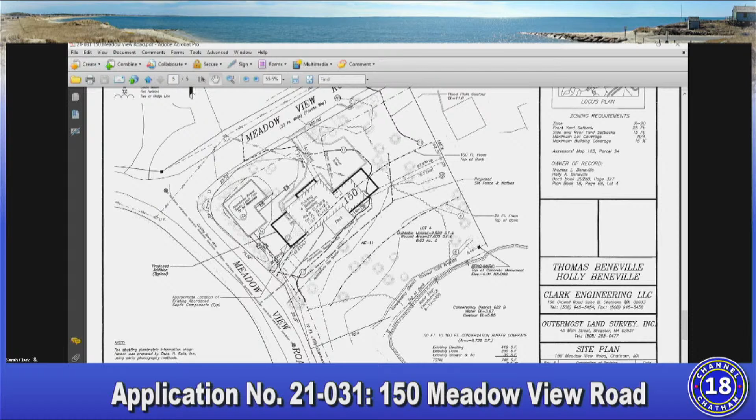Impact of scale, siting, and mass on neighborhood visual character, including views, vistas, and streetscapes. As you know from driving down the street, there's a lot of vegetation on the Beneville lot.

And the house is set back, so that the ridge height is not changing. There will be a second floor over the garage, and there will be a second floor over the master bedroom addition, and they've put dormers in there to provide some light and make them a little more useful. But you don't have the full 2-story visual impact you have from some of the homes on the way in

from Barn Hill Road. So we believe that because of the way the design is sited on the property and how they managed to keep the same scale, these changes will actually have a positive effect on the neighborhood visual character and streetscape.

As you know from being there, there's no views and vistas to be concerned about. So I think that you could find that this project, as designed, does not constitute something substantially more detrimental to the neighborhood than the existing project.

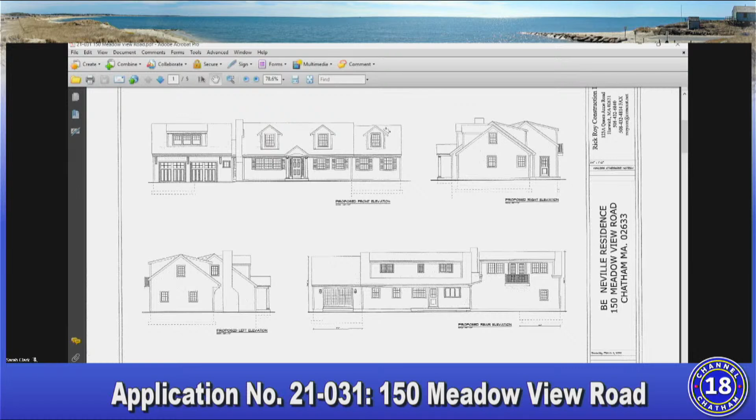If you noticed when you went to the property, there's an elevated or raised septic system in the front corner of the lot, because the town has run sewer down there. The property will now be on the sewer, and that septic system, which is not particularly attractive, a lot of trees around it, will be removed. And so we think that will actually enhance the look of the property and the way it fits into

the neighborhood. The impact of traffic flow and safety, it's just Tom and Holly there most of the time. We don't think there'll be any impact on traffic flow and safety. And noise and litter, Tom told me they're very quiet, so we don't think there's going to be any problem.

So that would be our presentation. I did want to point out the note from Dave Clark, in which he points out that in 2014 the floodplain was elevation 8, which is elevation today on the current plans. So prior to the 2014 map change, the buildable upland was in excess of 25,200 square feet.

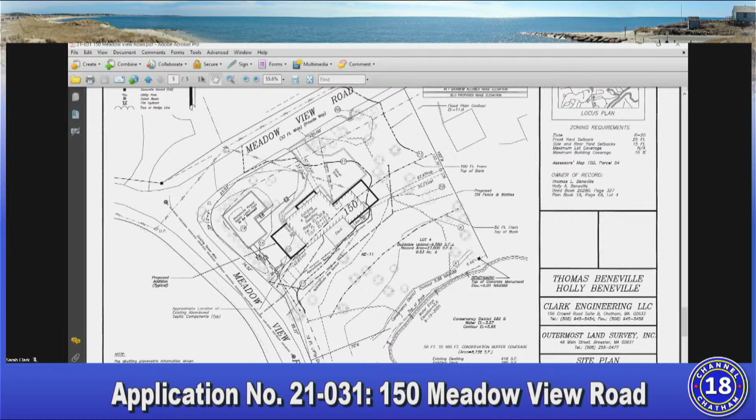So we believe that the proposal is reasonable under the circumstances and is not substantially more detrimental. And that would be our presentation, Mr. Chair.

Okay, thank you, Mr. Riley. I would now ask if there's anyone in the audience who wishes to speak in favor of this application. If there is anyone, please indicate on the screen that you wish to speak so that Sarah can recognize you. I see no one that wishes to speak in favor of this application.

Okay, then I'll read the correspondence. The first is a memo from Judith Giorgio, the health agent for the town. Board of Health, she writes on 5/12, I have reviewed the plan to add an addition. The property is connected to the town sewer system. The proposal does not add sewer flow to the property.

I have no concerns. And then we have a note from our new conservation agent, that is Nicole Smith. She writes on Wednesday, April 21st, the applicant has received approval for this project from the Conservation Commission and an order of conditions has been issued. The submitted site plan matches what was approved by Conservation. That is the extent of the correspondence.

I would now ask if there's anyone in the audience who wishes to speak against this or has a specific question. If so, please indicate on the screen so that Sarah can recognize you. I see no one that has a specific question or wishes to speak in opposition.

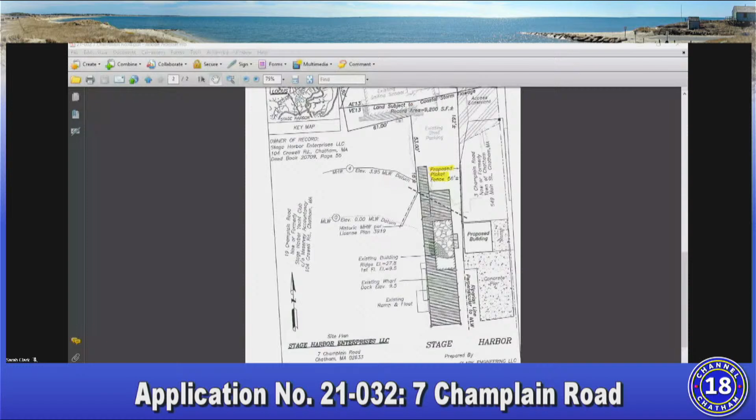I see no one that wishes to speak in favor of this application. Okay, then the correspondence, the first one we had was from Nicole Smith,

who wrote in April, the proposed fence is not included on the most recently approved site plan. Well, she then wrote after that, ignore previous comment, I didn't realize they were on the next agenda. Pending approval of the RDA, conservation is okay with the project proceeding.

And then we have a note. This is from Sharon Brown, and she writes on April 28th, Michelle Hannon, our new collections assistant, has reviewed the account history and informed me that Stage Harbor Yacht Club has not paid their water bill in months. If they are paying today, the amount due is as shown. Otherwise, they may want to add a little extra to cover the interest.

So, Mr. Riley, what's the story on that? Well, I forwarded that email to my client, and there was a lot of head scratching going on, and then they just wrote a check for the $43 or whatever it is, and they don't know why the bill wasn't paid, but anyway, it's paid now. Thank you very much. Okay.

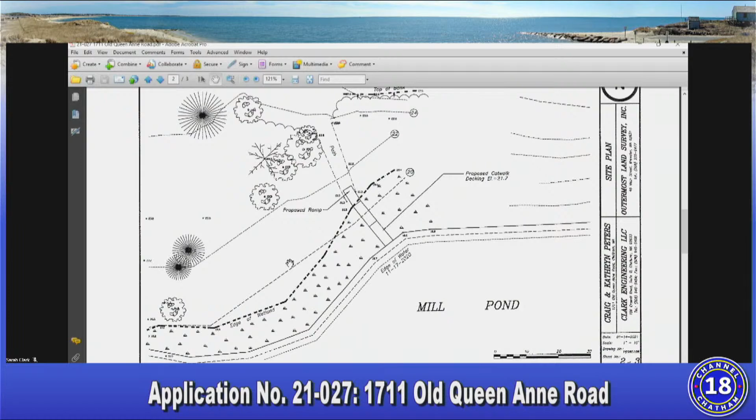Thanks. So this is a request for placement of a portable catwalk to provide for access to the pond, generally known as Mill Pond, behind our house on Old Queen Anne Road. The plot plan is shown here, including the size, which is fairly limited. We have had this reviewed by our environmental consultant with the conditions of making it non-opaque. It will be aluminum, so there's no wood leaching, and the interpretation was no impact on local vegetation. We would have it in position only from May to October, and then remove it and store it up on the property during the winter months. We went through the appeals criteria, most of which are either included in the plans that you're looking at, or were not directly relevant in terms of things such as scale and local compatibility, sewage, and traffic as such.

Okay, I don't think you need to elaborate on any of the criteria. Anything else to add, or you're done? No, I think unless there were specific questions. Okay, well, we'll get to that.

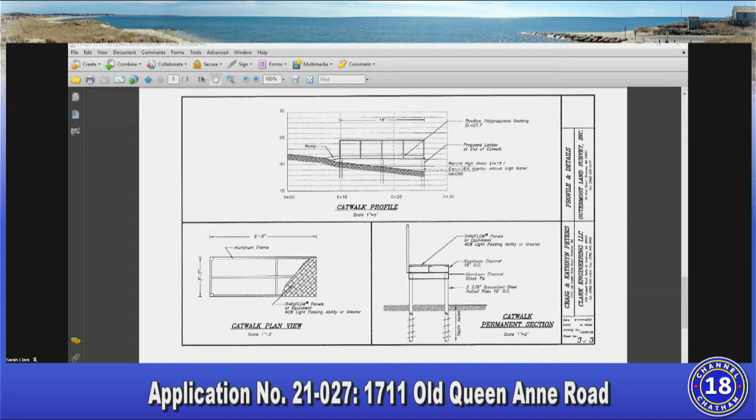Very good. All right, I would ask in the audience if there's anyone who would like to speak in favor of this application to please indicate on the screen so that Sarah can recognize you to do so now. I see no one that wishes to speak in favor of this application.

Okay, then the correspondence is from Nicole Smith. As I mentioned, she's our new conservation agent. She writes on April 28th regarding 1711 Old Queen Anne. They will be before us again on May 12th. They will likely be approved, but at the last hearing, we were waiting for the state to issue the permit number and for comment regarding endangered species. All the other filings have been received by the Conservation Commission approval, except for Riverview, which, well, that's getting off the path.

So tell me what happened at the meeting on May 12th? Mr. Peters? David Clark, who I think is... Okay, David Clark attended that meeting and may be able to give us that information. Please. David Clark here, Clark Engineering.

So we continued the meeting on May 12th to May 26th because we were not in receipt of the comment letter from the Endangered Species Program in Massachusetts. Secondly, Conservation asked for a mitigation plan, which is still being prepared, so they want 2-to-1 mitigation for the footprint of the catwalk. Blue Flax Design is finishing that plan up, and we will present it to the commission on the 26th.

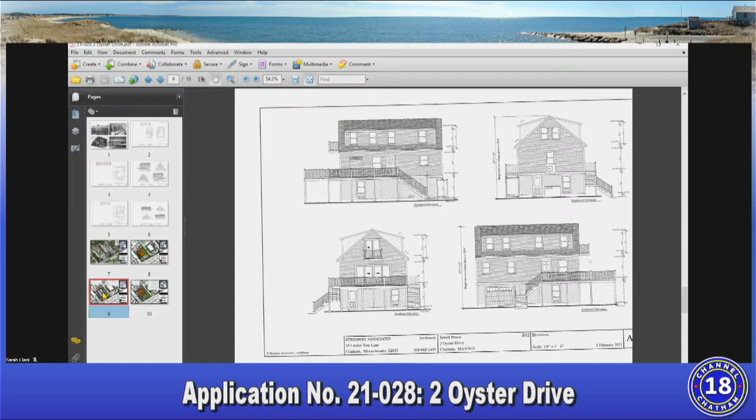Because of raising the first floor above the ground, one has to provide some outdoor space to congregate immediately outside your living area, which we are adding a deck, smaller than the existing patio area, around two sides. A small deck would allow two means of egress, which is required by code. The stair coming up in the front turns because it has to avoid the garage door opening. But in this case, it is well behind the lot line, 2.6 feet behind the lot line.

Those are the extensions. There's a little bump on the right hand, northeast side. That's a little gas stove equivalent to a fireplace chimney. So this is very simple and straightforward. We have a few things we're hoping to accomplish inside with 3 bedrooms, living room, dining room, and kitchen.

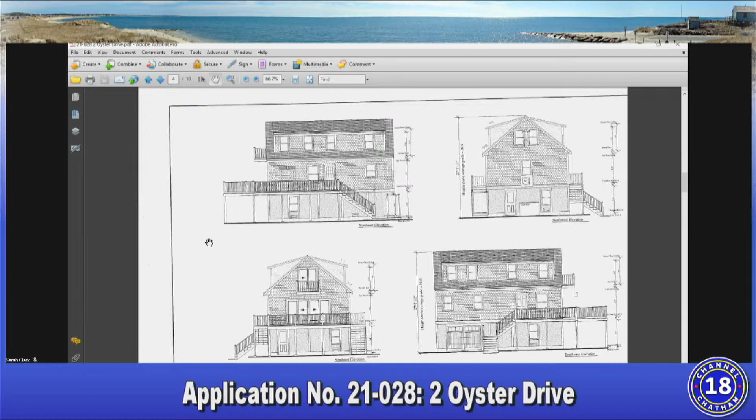The impact on visual character and views of vistas: the proposed house, as raised, consists of a first floor with a combined living, dining, kitchen, utility room, and half bath. Second floor consists of 3 bedrooms and 2 baths, adding the second floor dormer space within the 1-story roof. The lower level is treated as a storage area with only a few windows to keep it in scale. All parts of the elevation are designed to follow pleasing proportions, and the raised level will improve the view of Chatham's eastern shore from the deck.

Compatibility with the neighboring uses: the proposed structure is purely residential in nature and fully compatible with the residential district.

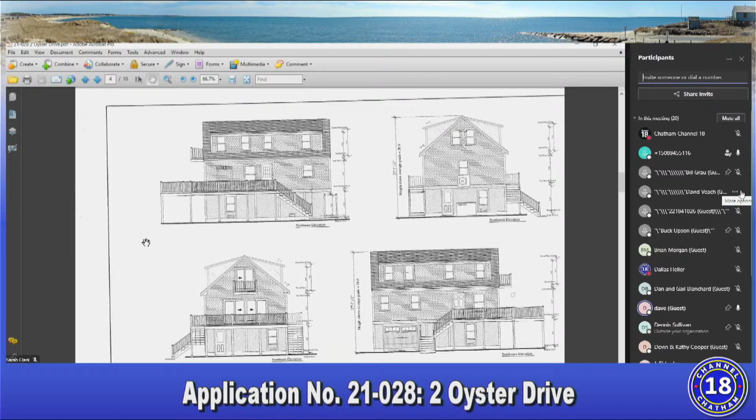Adequacy of sewage disposal, source of water and drainage: the existing house is on a condominium septic system, which is sized for no increase in flow of the existing 2-bedroom sewer, and no increase in flow is necessary. The house has town water supply.

Impact for traffic flow and safety: the proposed project has no effect on traffic flow and safety. Since the house is located on side streets, construction vehicles do not block traffic. Construction is confined to a small area on the site and should be complete over a short amount of time after the summer.

Adequacy of utilities and services: the house is adequately served by water, gas, and electric.

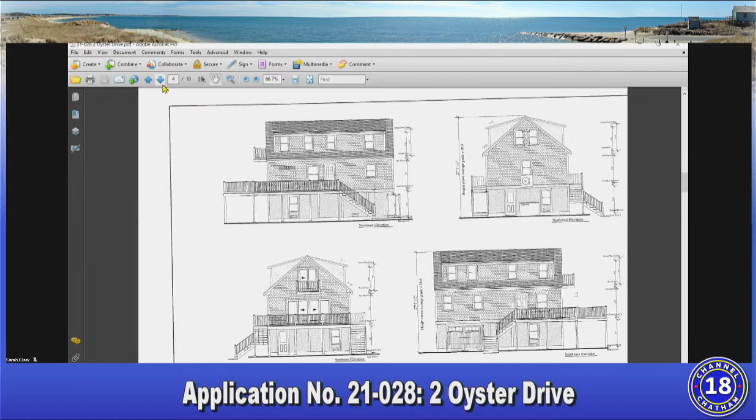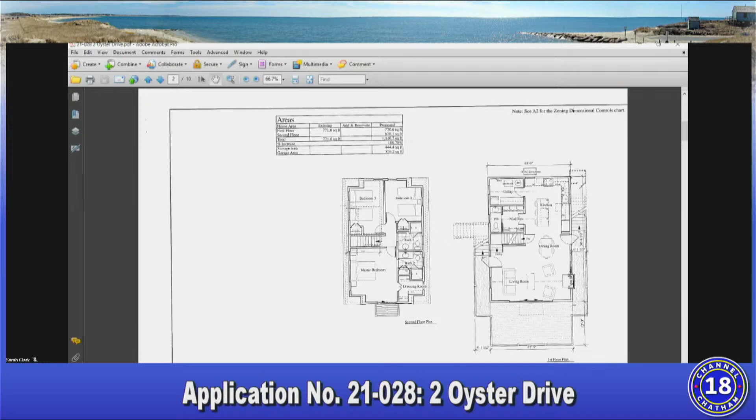Is there anyone in the audience who would like to speak in favor? If so, please indicate on the screen so that Sarah can recognize you now. I see no one that wishes to speak in favor of this application.

I will read the correspondence. First is a memo from Judith Giorgio, Health Agent, Board of Health. She writes on 5/12: I reviewed the plan to demo and rebuild. The property is connected to a shared Title V system. The dwelling proposed does not increase the existing sewage flow above the existing 2 bedrooms, and therefore is acceptable. I have no concerns.

Then we have a note from Catherine Halpern, the Planning Board Chairman. She writes on April 21st: The Planning Board at their April 12th meeting reviewed the ZBA's request for comment. After review of this request, the Board voted 7-0-0 to send a positive recommendation with the condition that the driveway shall be constructed of permeable material and shall be constructed in a manner which permits the unobstructed flow of water.

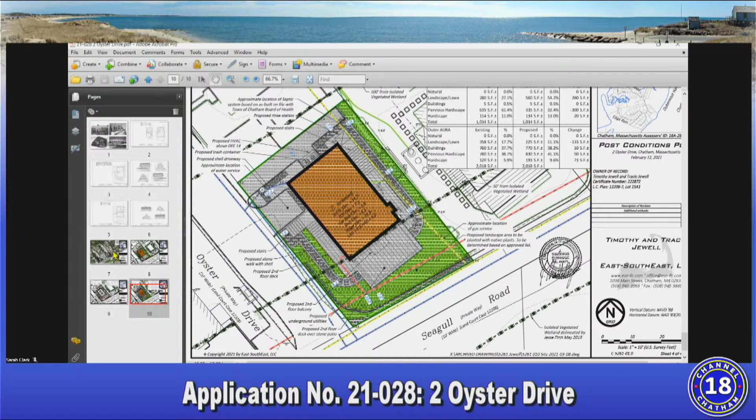There are easements in place for it. That's part of the full shared septic system that's out here. Sarah, if you go to page 1 - I believe we showed, yes, on page 1, if you zoom in a little, you can see the septic system that's out there with all the piping coming from all the buildings going to the rear of the property. That's a fully easemented shared system for the entire neighborhood. I assume that was a septic tank from the symbol, it just didn't appear like any of the other houses - that's why this may be the time to address it. I don't know if in your plan you were planning on doing anything with the tank, utilizing the same tank, not really moving it or changing any other aspect of the septic system. But with a tank encroaching on the adjacent property, this might be the time to address it.

And that tank is there with a variance from the Board of Health and a number of other hurdles. If we were to move it, it would be a little cumbersome. But with the easement in place, it's not broken, no need to fix it.

The other question I had was what material are you going to use on the driveway, assuming you're going to abide by what the planning board suggested? Shell? The driveway exists as a shell, proposed shell driveway. We would maintain the same approach, even the part going up to the garage would be shell.

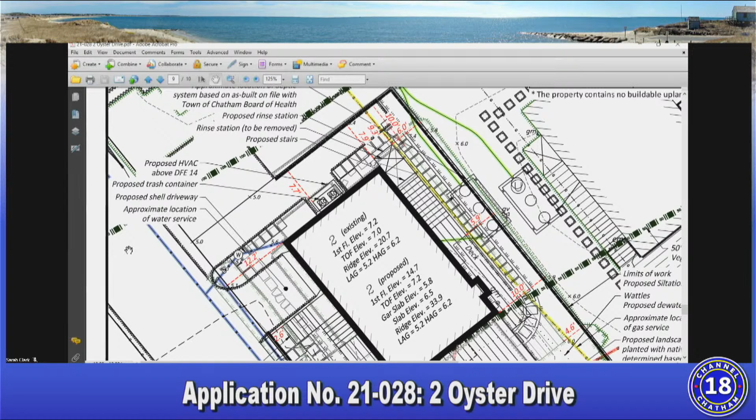Okay, that's all I had. Thanks, Dave. Okay, Dave Veach. Yeah, I'm trying to, I can't tell from my memory, perhaps someone present, either Sam or the engineers or whatever.

I'm trying to remember in the building next door on 3 Scallop Terrace, we approved that within the last few years. Was that also an increase in adding a floor to the cottage or not? Does anyone know? The adjacent house was a cottage similar to the Jewells, and we raised that up a year ago. And yes, a second story went up, on half of it.

So similar situation to what we're proposing here, correct? Very similar situation, except for the clients wishing to keep the bedrooms all upstairs and have a full downstairs. Okay, all right. Thank you. That's all I have.

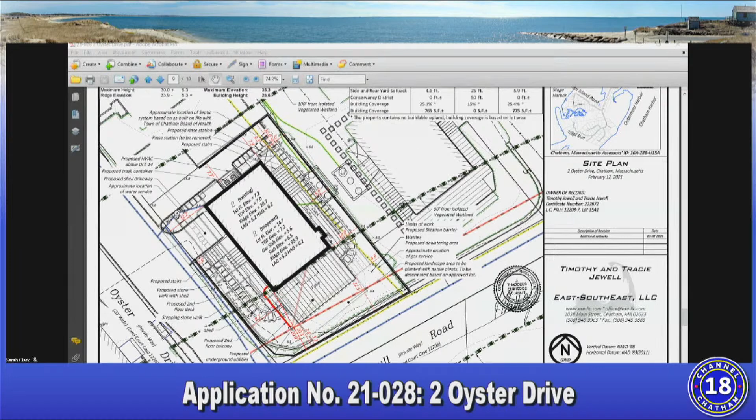If I may add, the height is similar between this house and the neighboring house. We have an elevation. Okay, thanks. Pat.

Paul, questions? My questions have been answered by the discussion that's just been had. Okay, Buck.

My concern is the criteria number 5, impact of scale, siting, and mass on the neighborhood visual, including views, vistas, and streetscapes. And I was wondering, when you talk mass, would you normally define that as cubic feet? It varies because a 2-story house that has an eave on the top of the 2nd-story windows has a completely different impact than a house such as this, where the eave is above the 1st floor windows and there's a dormer roof

set into the roof, so that the scale is broken in half by that 1st-story eave. This is the nature of Cape architecture. I'm not sure that answered the question. You're not using, we can't use cubic feet for defining mass. I've never dealt with a zoning code in my experience that deals with cubic feet, because it wouldn't necessarily be evocative of what the streetscape is.

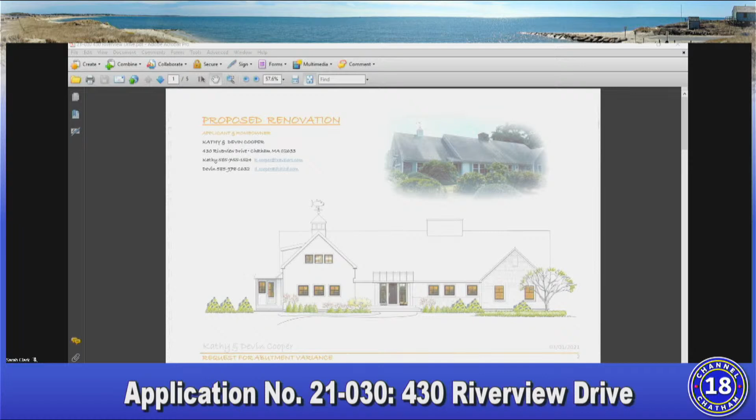So what we're looking for is a small setback on one abutment and then a total square footage change. What's taking place is a mudroom. I'll back up a little bit. The current entry is in the front into a small kitchen, and we're going to move the kitchen to the back corner of the house and create a walkout kitchen to the patio and out to the pool. At the same time, we'd like to create a mudroom that comes in from the driveway so we can come from the existing driveway past the existing one-car garage and enter through the mudroom directly into the kitchen.

Aesthetically, looking at the house, we already have plans. Everything is 1972 or 73 construction, original. So there are updates to the house: a window package change, a roof change, and a roof pitch change on the front from the gable end running east-west to north-south, to give us a little more space over the current garage and kitchen space that we're sitting in right now.

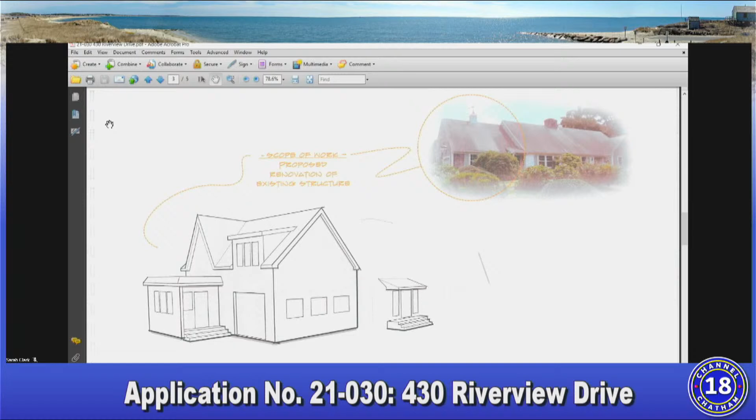So that's, oh, you've got a bad picture of the rest of the house, but that's the scope of the work. Covered here on the front elevation shows the new entry into the old kitchen with a small farmer's porch. And then on the left, or east elevation, shows the elevation changes to the mudroom and a bump out on the back, which is included as part of the overall increased coverage of the lot.

So I'm not sure how in-depth you want to go into it. Well, I think you've explained what you want to do, but what you have to go into depth on is explaining the variance criteria.

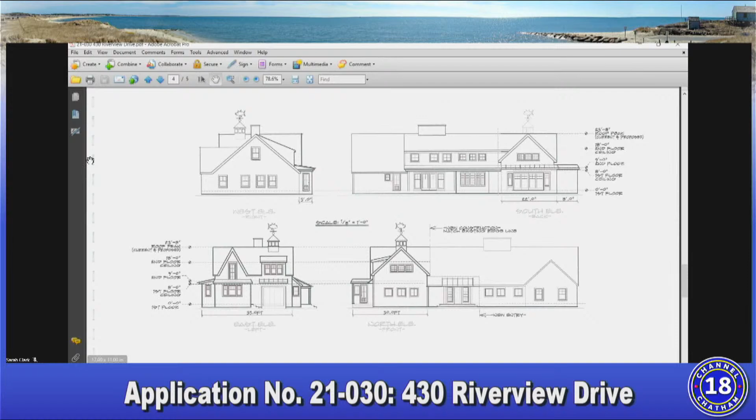So if you jump back to the engineer drawing there. The current criteria on that corner of that 8 by 13 foot addition is a 25-foot setback, so we're asking for a variance on the abutment to 18.4 feet. And then the total lot coverage with the new farmer's porch and the additions on the back, the other one which is the addition on the kitchen bump out, brings our total lot coverage to 10.26%, from existing 2,746 to 3,028.

Okay, well, you're not addressing the criteria. Okay, my apologies, I'll read this to you. In order to qualify for a variance, you must be able to demonstrate that you meet all three of the requirements. A variance is an extraordinary zoning remedy and no one is entitled to it. So the first one is: owing to circumstances related to the soil conditions, shape, or topography of the land or structures, and especially affecting such land or structures, but not affecting generally the zoning district in which it is located. So you need to address that specifically first.

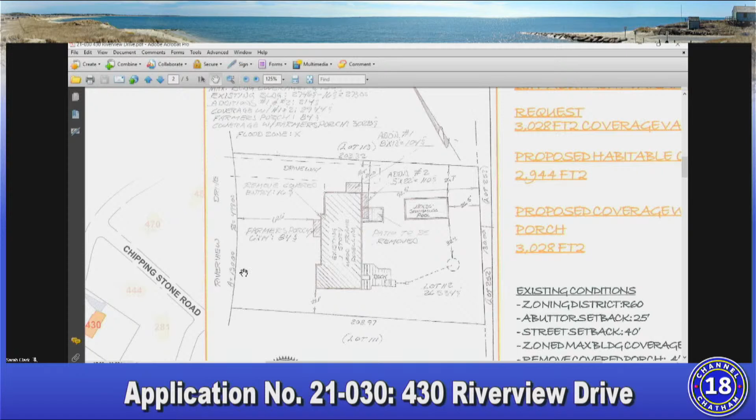I apologize, the Board of Health said it won't increase the second floor. I didn't get everything he was reading there, and I don't have it in front of me, so my apologies to the board. I don't have it, somewhere on the application. Well, the Board of... I didn't catch that. Okay, perfect, thank you.

So number one is what we're speaking about first. No, it doesn't... well, it's owing to circumstances relating to soil conditions, shape, and topography of the land or structure, especially affecting such land and structure, but not affecting generally the zoning district in which it is located. I guess the criteria comes from the Board of Health saying that it does not adversely affect. No, the Board of Health has nothing to do with it. This is the Zoning Board of Appeals criteria; you must speak to all three of these, and all three need to be true for us to consider it.

Okay, so let's take number one. What is it relating to the soil conditions, shape, or topography of the land or the structures that's unique about your situation that is not generally affecting the zoning district and the other lots around you? Well, we're not changing the soil conditions, the shape or topography of the land. The structure is not affected; we're not regrading or affecting the soil conditions or the shape or the topography. Okay, all right, so let's go on to number two: a literal enforcement of the provisions of the ordinance or bylaw would involve substantial hardship, financial or otherwise, to the petitioner.